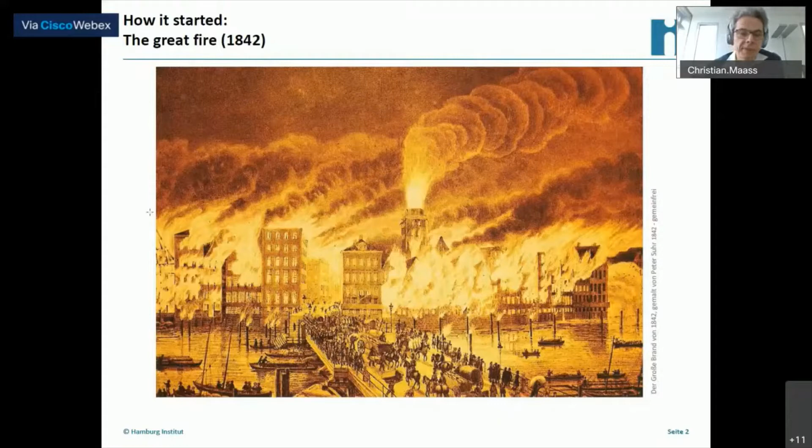And so the city's Senate at that time concluded that they wanted to prevent this happening again. And so the new city hall was already one of the first customers, more than 120 or 130 years ago. The first district heating plant was connected just a block away from the new city hall, which is in this picture.

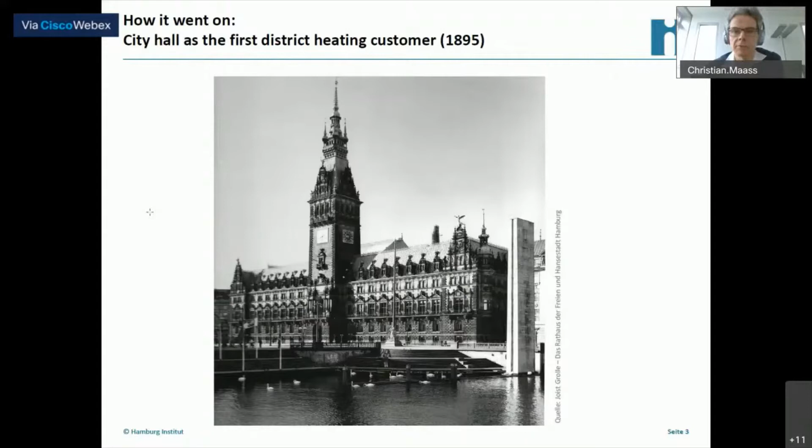So it was quite a symbol that the city hall was basically the nucleus of the district heating system, and it didn't come to their mind that we'd be talking about climate change as we do today when talking about district heating. It was for different reasons, of course, as in most other European cities, as most of you are familiar with. So we have come a long way. Maybe looking back just a little bit more.

So the first phase of the district heating system in Hamburg maybe could be called the central city heating, and the main driver, as I said, was fire protection, but it was also abatement of air pollution. So central boilers outside the very main inner city, particularly after the Second World War, trying to prevent some of the pollution the city was suffering at that time, and also the dependency on imports was quite an issue in the first phases.

When oil played a big role in the heating of the city, the aim was to substitute it mainly with coal, of which Germany, as you know, has or had a lot. So these were the main drivers for these centralized systems. And then the second phase maybe could be called district heating with a large coal CHP.

And this is the heritage that we're dealing with today and that I want to talk about a bit further. So we had a big grid growth after the Second World War, particularly in the 60s, 70s, and also in the 80s. And in terms of production, we basically had two very big plants, not in the city center, one even outside the city boundaries. And sorry for not translating here one of these sentences.

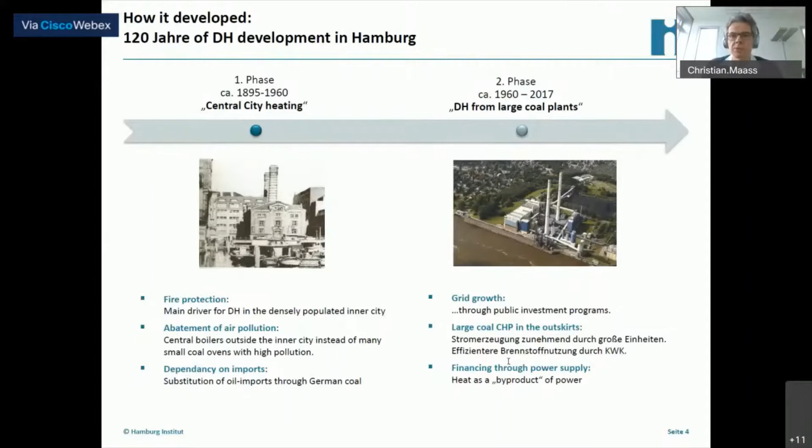So dealing with this heritage is basically what is lying ahead of us today, because we are still at a point where we are far from being climate neutral or anything that we call sustainable. So the footprint of the district heating in Hamburg depends a lot on how you calculate and how you allocate the CO2 emissions between the product of power and the product of heat.

But if you calculate it in the official way that the official statistics go, then the district heating is not better than decentralized efficient gas boilers. So the district heating covers around 20% now of the total heat demand. It's supposed to grow significantly in the next 10 years, up to 35%. But today, even though it has only 20% of the total heat demand, it causes 30% of the CO2 emissions because of these coal boilers that are basically feeding the district heating system.

But Hamburg has actually made a big turnaround regarding its goals. One of the biggest steps in the Hamburg energy policy in the last years was to buy back the district heating system. In my view, it was a big mistake to sell it in the first place, which happened in the late 1990s due to budgetary reasons. Basically, the city government at that time wanted to make money, and they sold the district heating system to a foreign company. And so it was not in control of the district heating system anymore.

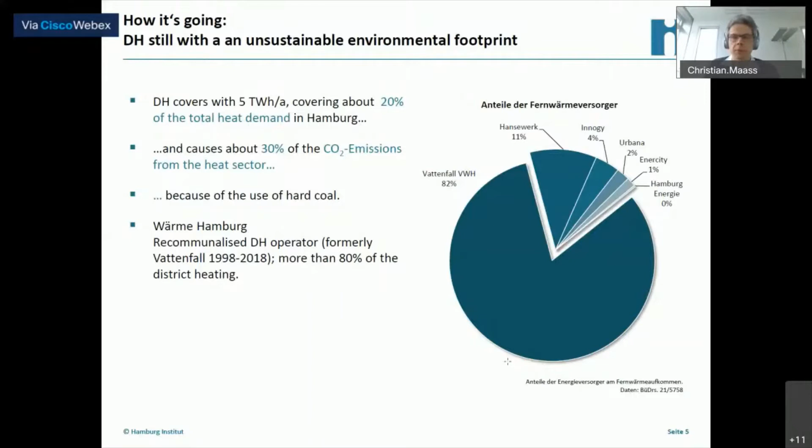And so the city government, or actually the city as such, realized that this was a mistake and voted in a referendum to buy back the system for about €1 billion. So that has come into effect, and we're now back in the control of the district heating system. And so now what is being done is to use this control and to make the system sustainable. And that's what I want to talk about in the next slides.

So what's ahead of us? These are the two plants that Senator Kerstan talked about, Wedel and Tiefstack, both of them coal-fired CHP, and they make 2/3 of the heat generation, and that has to be compensated, 700 megawatts capacity overall. So it's quite a bit that has to be done in the next 10 years at the latest. That's when the law says that coal has to be phased out for district heating in Hamburg. In my expectation, it will be earlier, though.

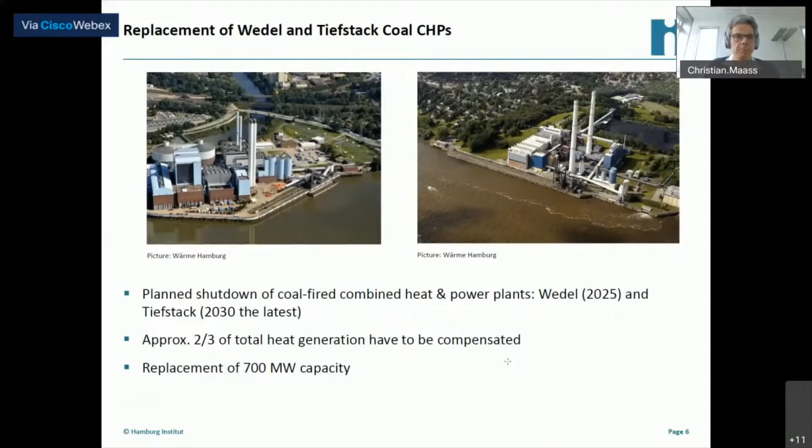So we're starting with the plant in Wedel. That is the first plant that Mr. Kerstan talked about. So it will be decommissioned in 2025, hopefully. And so it will be replaced by the mixture of technologies that we have already heard about today. So it's a mixture of waste incineration, of course, also the industrial waste heat, a heat pump, which is something new for German district heating.

Those of you from Scandinavia may think, well, that's an old deal, and why does he talk about it? No, it's not. In Germany, it's quite something new. We have large heat pumps in district heating systems. We're just seeing the first cases here. So it's a cluster of low temperature but also high temperature sources, as some of the industrial waste heat is actually high temperature waste heat, and also the waste incineration is not low temperature heat.

And also the CHP that we have heard about, they are making up a large bit of the district heating system. So that is something that will maybe carry us for the next 15 years or so, but it can't be the solution, of course not. Just switching from coal to gas is not taking us to where we want to be. So we do need some extra capacity for power production as we phase out nuclear power plants and as we phase out coal power production in Germany. So in fact, we have a need for some additional gas power production. And of course, it's reasonable to produce this power in CHP and also to take advantage of the heat that is produced in these plants.

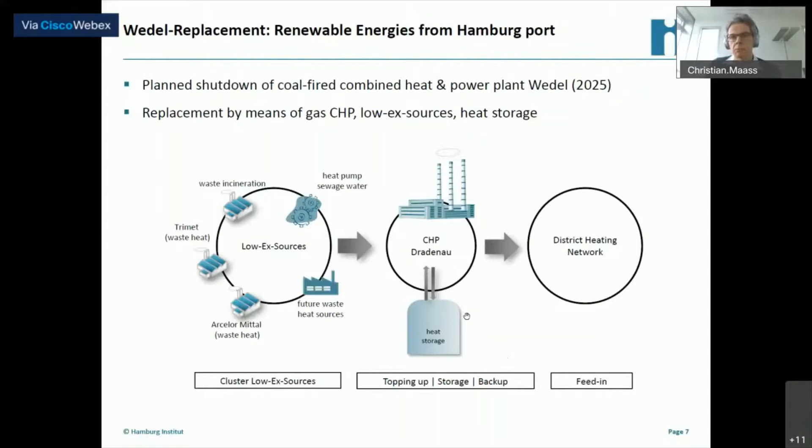And also they will play a big role in topping up the low temperature heat sources, because today our system is not able, we have talked about it and heard about it earlier, to deal with low temperature heat in the Hamburg district heating system today. So we need on cold winter days 120 degrees, and it will take decades to lower the temperature needs. And so to have some sort of higher temperature heat sources to give the extra 10, 20, 30 degrees from the low temperature heat, that is something that we depend on in the next years.

And so the mindset that we see at large district heating, the third or fourth district heating generation now, is coming away from the system that we have just talked about, the first generation and the second generation with large plants outside the city. And we're seeing a much more integrated, and we see it as a platform, basically, the district heating system. And we have to incorporate many different sources, and these sources will be very diverse, of course. And so we've talked already about industrial waste heat, maybe some solar as well.

Of course, district heating will have much dependency on the power system. We should use the power, but as efficiently as possible. So large-scale heat pumps will play a big role. We'll also see some biomass, I think, especially for peak boilers.

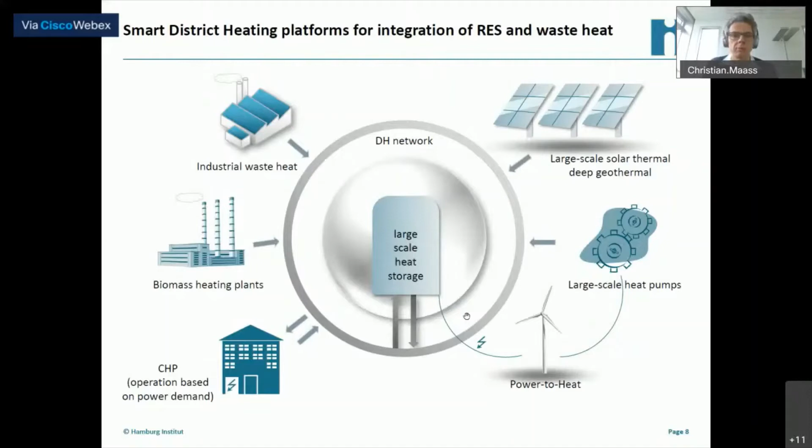Now, it's also about a transformation of the entire system, not only about the generation, we've talked already a little bit, but also about the distribution and the storage, we will talk about a little bit more, but also maybe on the sales and on the consumption side, on the metering side, lowering return temperatures. That's something where the heat customers have to be involved. And there are many instruments, and we will have to look at this closely in the next years. But I can't go much more into detail here.

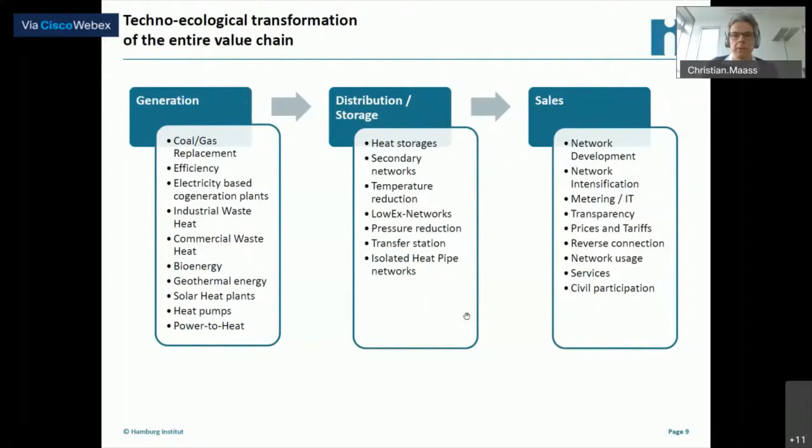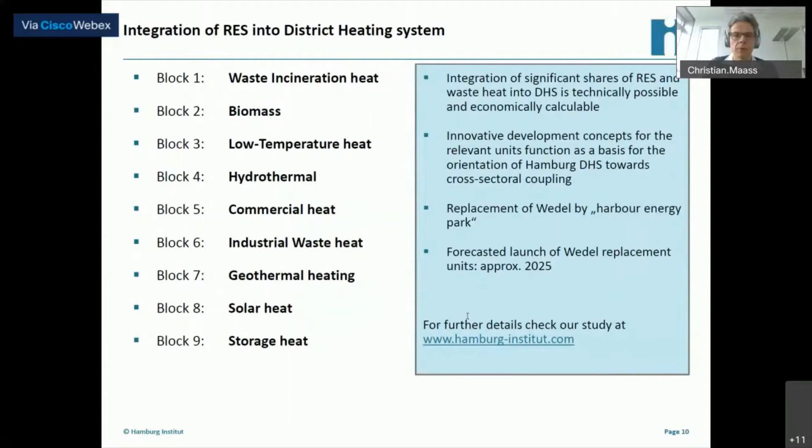So looking at the generation side is what I want to emphasize today. So we have some bricks or blocks that can feed into this district heating system, this new generation district heating system that is being evolved in the next years. So this is an overview here. And we will go straight into all these blocks one after another.

Of course, waste is the typical renewable, if you want to say so, source for district heating. That's something that has been done for decades now, not only in Hamburg but in most cities. But even though it's an old deal, there has to be some innovation, I think. So waste incineration is of course not done for the purpose of district heating, but it's done for getting rid of the waste. And so there are some restrictions on what district heating demands can do. But to use the energy from these sources as efficiently as possible is also something that has to be aimed at.

And so at the moment we have in all these plants here power production that is basically feeding power the whole time into the power grid. We don't need this kind of power production in the future. What we need is a more flexible power production. We have many hours with very low power prices. We will have many more hours of negative power prices as wind and solar power production will rise in the next years. So it could be a good idea to lower the electricity production in these waste incineration plants and feed more of the energy into the district heating system, and also to store the heat when there is an overproduction of heat. So that is something that could be done.

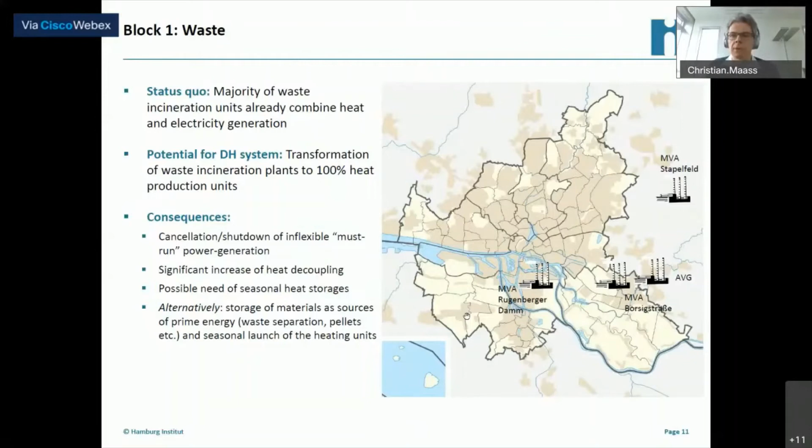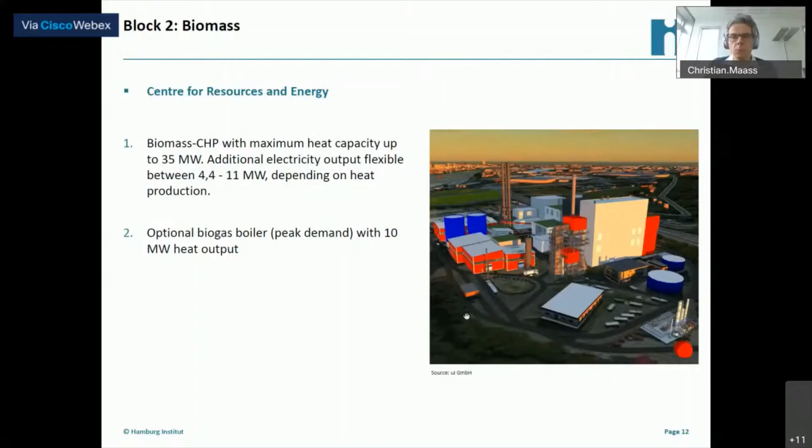Looking at biomass, of course, is something that is a low-hanging fruit, and that has been done not only in Hamburg, but in most places where they look at transformation of district heating systems. So what is planned here is a biomass CHP plant by the city-owned waste company with a 35 megawatt capacity, flexible power production, so it can alternate between 4.4 or 11 megawatts. So that's quite some flexibility, and also optional biogas boilers with a 10 megawatt heat output. So I think that's a reasonable use of the domestic waste, basically, we have here in Hamburg.

We've also studied, of course, other biomass sources. Of course, there are limited sources only from regional sources. Forest wood: we have a lot of forests that are actually dying and have died in the last days, so there's a lot of wood coming up in the next years. Also, short rotation plants. We looked at straw. There are quite some resources to be picked up there. Also, some other residues, maybe even grass. But in the end, it's a limited availability.

And also what we must see is that there is much more demand for high temperature energy and combustion processes in other sectors. In district heating, we don't need combustion, actually. So we should try to avoid combustion where we can and give these limited resources to the sectors that have a much higher need for higher temperatures. We can deal with low temperatures, and we don't need biomass. So let's limit as much as we can.

We're also looking in Hamburg, or I must say, the administration is looking at the import of wood chips. We've seen a lot of conversion in the Scandinavian states with import of wood chips from sources that claim to be sustainable, but I have some doubts that in the end that's really the solution, to import wood chips, and that cannot be done at a large scale in many cities at the same time. So we should limit that to peak boilers, even if we have some sources that are quite interesting to look at, as the city administration is doing now.

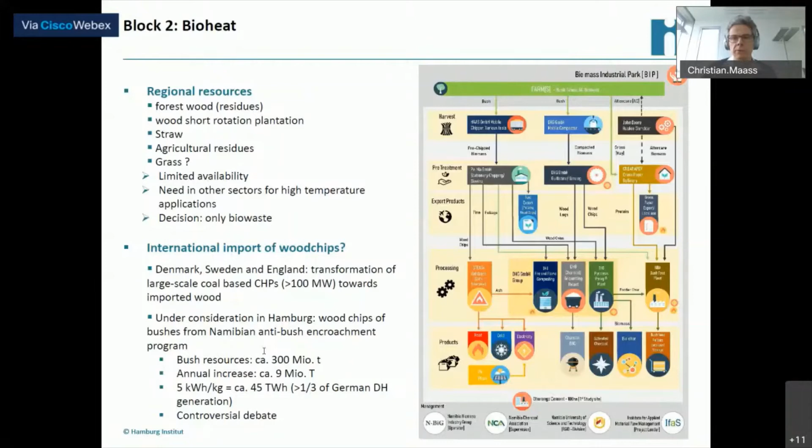So undisputed basically is to use the waste heat from sewage treatment plants. That's been done in Scandinavia now for a long time, and quite a success story. It hasn't been done in Germany because our power prices have been too high. And now, as the federal level has come up with new legislation, making exceptions there and making power prices affordable, having also a big scheme in the new CHP law, we see that it's actually economically feasible to use large heat pumps in the sewage treatment plant. And that's one of the big issues here that will replace a big part of what is needed from the coal decommissioned plants.

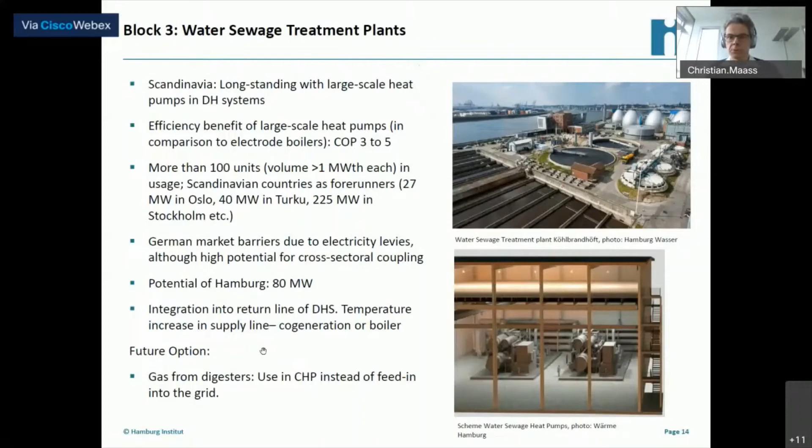Also, we have big rivers, as you all know. We have the Elbe River in Hamburg, and it's basically in the middle of the city. So using the heat in this river is not rocket science, and it's also done in many cities, especially in Scandinavia, where heat pumps have been a favorite because of the low power prices. And so we haven't studied that really deeply yet, but I'm sure that this will play a very big role in the future of the Hamburg district heating system, as this source is so easily available, as the existing power plants are located right at the river.

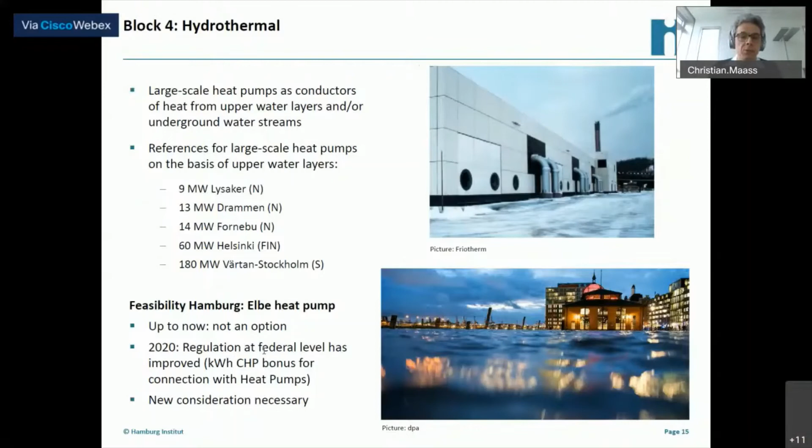You can even use the cooling water plants that suck the water out of the river so far to cool the coal-fired heating plants. You can use these devices to get the water for the heat pumps. And so half of the infrastructure at these sites is already there. So I think we will see some conversion of the district heating power plants to river water heat pumps.

Also, using waste heat from decentral heat sources will be a big deal in Germany and in Hamburg, as we have seen already. There have been lots of studies in London as well, showing that even a city like London that does not have any big industry, but rather low temperature commercial waste heat from warehouses and freezing houses, data centers, and so forth, could basically heat the entire city if there was a low temperature district heating system there. And looking at Stockholm is also very encouraging, where the data centers can feed quite many dwellings already. So we will have to look at this much closer in Germany and in Hamburg as well, but we've just started to do that.

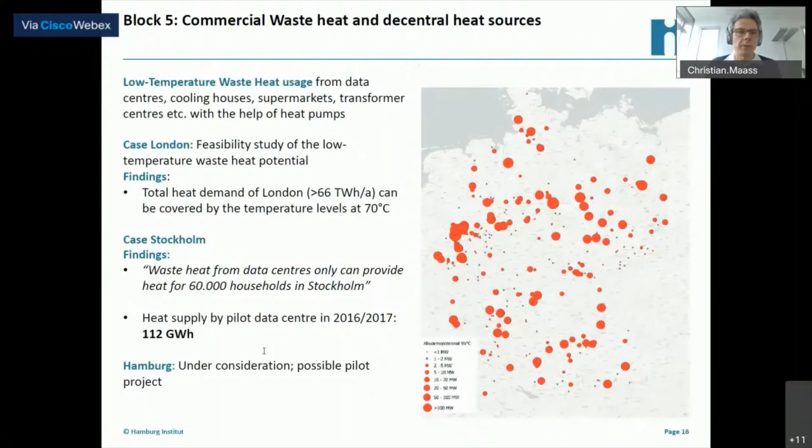We're much further with industrial waste heat, as we have a steel smelter here, we have the copper smelter that we have just heard of, we have cooling water here, and we also have an aluminum smelter. And so 3 large metal smelters here in Hamburg. And so using this energy will be quite decisive to come up with a big share of climate neutral heat.

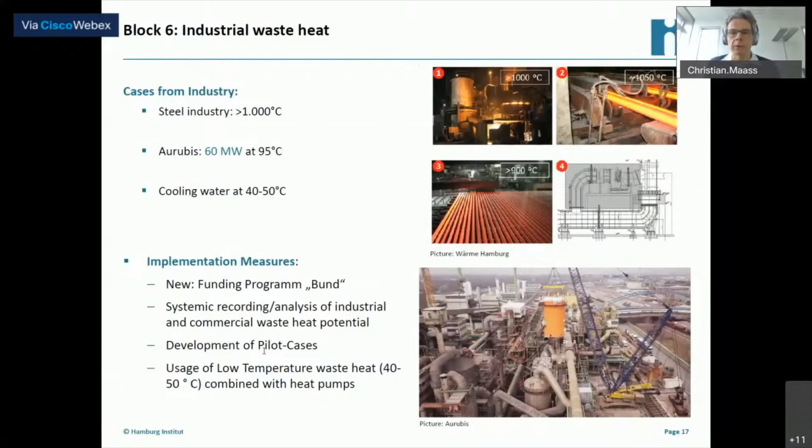And we've got some new funding programs, which could still be better, as waste heat is not considered as renewable heat yet, which is a pity when they come from efficient sources. And we're working with the federal level and trying to change that.

Geothermal has been a big unknown factor so far in Hamburg. We know now for many decades, I must say, that we have a high potential of geothermal resources. We're talking about 150 megawatts that we expect to have, where basically the city is sitting on, but we don't know it. No one has ever really in the last decades drilled there and knows how good the resources are. Because we're arguing about who's taking the risk, just a few million euros. We can't afford to wait any longer.

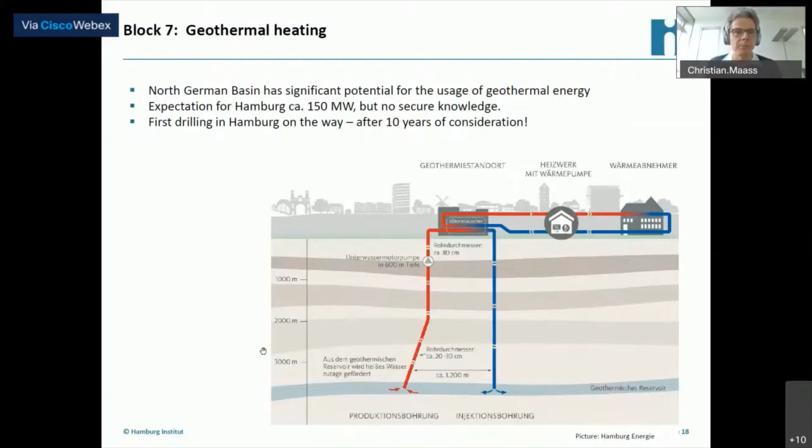And I'm very happy that now we have some federal money and we have the first drilling coming up in the next year already, I think, in Hamburg-Wilhelmsburg. And then we will know much better how good the resources actually will be. And so I think it has been quite worthwhile to follow up in this project. I've started this actually as a state secretary more than 10 years ago. And so it has been quite frustrating on the way not to see it going, but I'm very happy that it's coming now.

Solar heat could also be something, maybe we have seen already a picture of the heat bunker with the solar thermal on it. Of course, we have, as many big cities, limitations on the spaces, but we have also landfills that could be used for solar thermal. So that is something that is under consideration. I'm very hesitant that this will play a large role in Hamburg, because we have so much surplus heat already in Hamburg with the waste heat sources. And so I think it will rather be something that will be under consideration, maybe some more smaller sources, but it will not play a major role in the next decade or so.

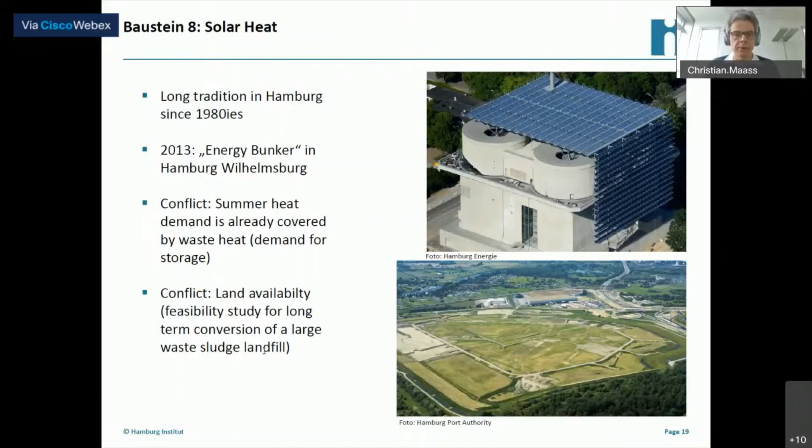What we definitely will need is large-scale heat storage. As I just mentioned, we have more heat sources available in summer from renewable energies and from fluctuating sources than we need. So we need to take this heat when it's there and transfer it to the heating period. And so we're talking not about these normal heat storages that every district heating system has, like 50,000 cubic meters or so, but we have to think in much higher dimensions. So the 200,000 cubic meters that are built already in Denmark, that would already be a good start.

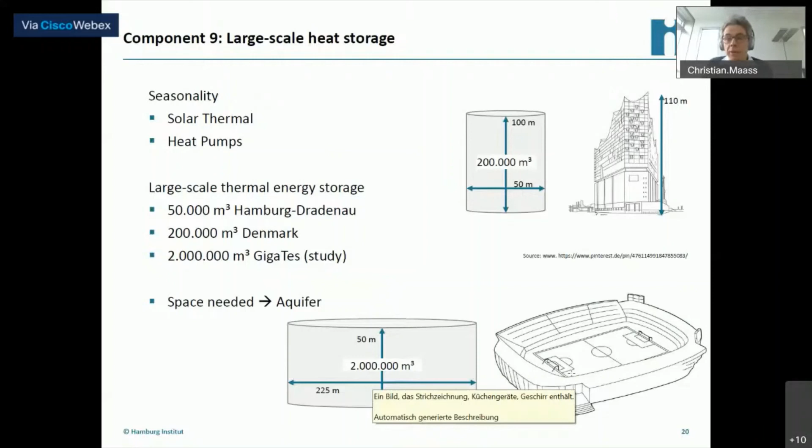Of course, we have the same issues regarding space in Hamburg. If you think of the space that is needed, you could think of basically a large soccer pitch, a stadium. So it's quite obvious that's quite a lot of area, and so looking under the ground is something that has to be done, and that is actually being done. So using the groundwater, the aquifers under the city, heated up in summertime with the surplus heat, and taking it out in wintertime. That is also done in the same project that is exploring the geothermal potentials. That is an option that will play a large role in many district heating systems, I think, in the future. And I'm very happy to be part of this project as well in Hamburg-Wilhelmsburg, looking at a different subject though, but it will be very interesting to see the results of this aquifer storage.